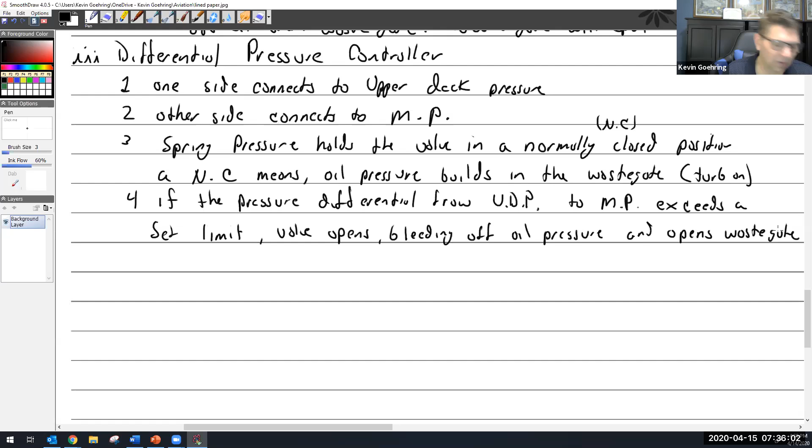The valve opens, bleeding off oil pressure, and opening wastegate. Opens wastegate, which would be less turbo. I'll put that, less turbo. Oops, less turbo, there we go.

And usually the set value for these things is around 2 to 4 inches of mercury. And the reason behind this, I don't have this on here, but I'll put 5. And all of this prevents something known as bootstrapping.

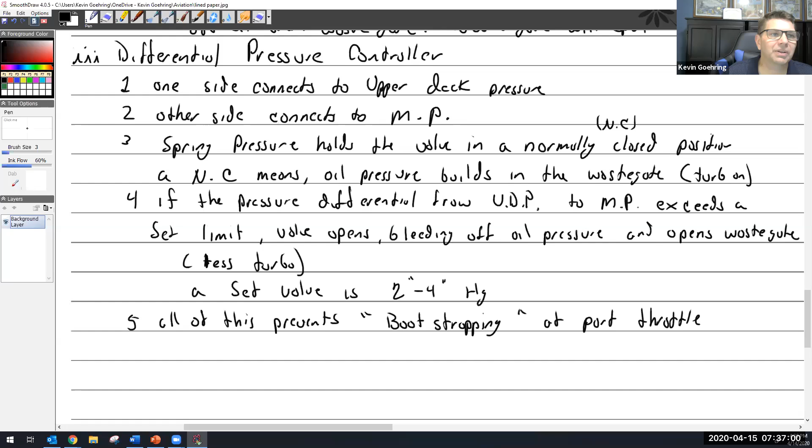At part throttle. I don't love the whole bootstrapping name, because the term bootstrapping comes from pull yourself up by your own bootstraps, which means to help yourself. I think throttle sensitivity is a better word for it, because it clearly defines what it is, but they call it bootstrapping, where just a little bit of change causes the turbo to speed up, and it speeds up, and that causes a little more change and more change and more change, and you don't really want that. So that's why they have that there.

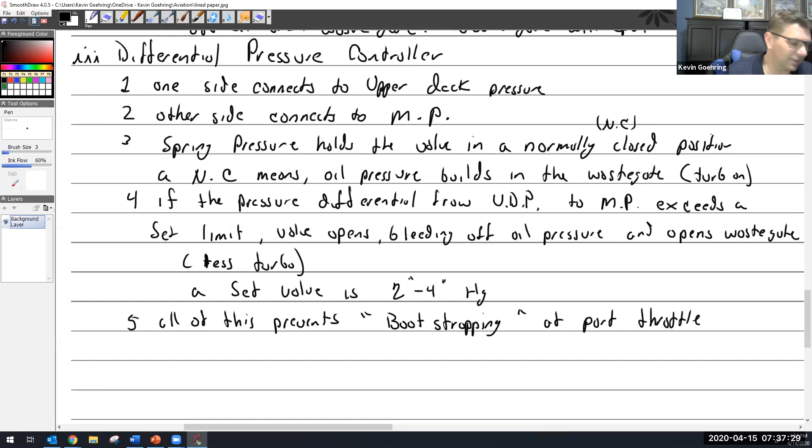All right, let's talk about—we'll just go through a little bit slower—what it looks like while it's operating, while it's actually running. So, operation.

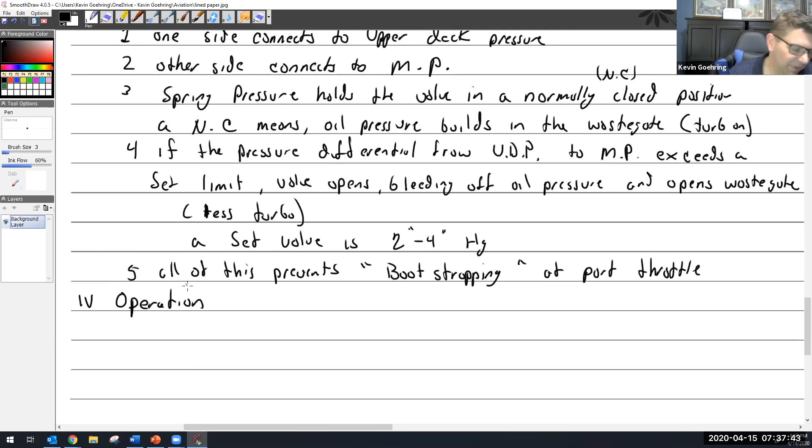So we got the engine running, so we'll say at part throttle. We'll start there, at part throttle. At part throttle, the density controller is closed.

Asking for more turbo, more pressure, right? We could say, why is it actually closed? Why is it asking for more pressure? Well, it's going to be really two reasons. One, because the density controller is doing its job.

But if the density controller wasn't in the picture, then we kind of have to think about—and this is a good thing to do to see if you understand the system—then we sort of stop and think about, well, okay, then what would the density controller probably be seeing? Well, if I'm only at part throttle, maybe 1800 RPM, not spinning too fast, we could perhaps say that there's really not enough exhaust pressure to begin with to spin the turbo fast enough to even get it up to 40 inches of manifold pressure. Maybe, maybe not—it depends on the turbo and the system, and what's happening with it.

Is it going into the sonic venturi, trying to pressurize the cabin and the doors open? Who knows what's going on, right? So it's probably asking for more turbo. So it's doing that. Let me see, where am I here?

Okay, yep. So, however, I'm going to move over now because I think everybody's probably got their notes written, and I can come up to here. Can you go back just for a second?

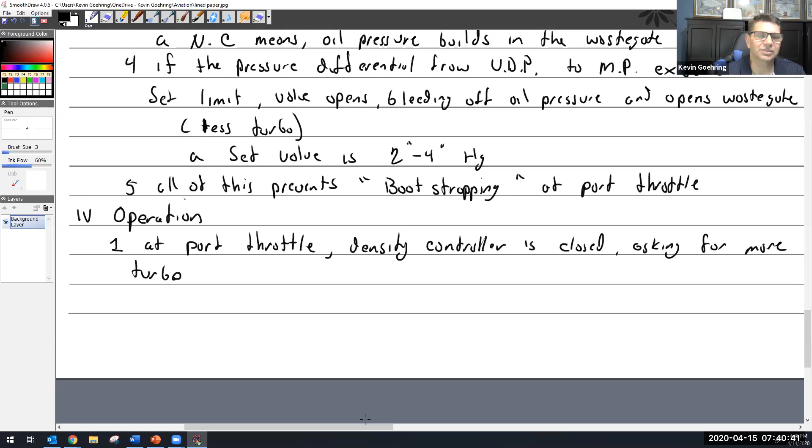More power. Okay, can I move it now? I'm moving. All right, nobody imploded.

Okay, so what else? So we'll make this point too. Point number one: part throttle, density controller, unless it's got its full 40 inches, it's going to keep screaming for more. Well, it's not going to have 40 inches, I told you for two reasons. One, because it's not all alone in the system. The differential controller is going to be inside the system, and it's already taking over control because it's going to activate first, because really the density controller is more designed for full throttle operations.

Here we are with the density controller; the differential controller has already taken command of this system because it can. So the differential controller, meanwhile, the density controller -- nope, don't want to say density controller, don't want to say that. Does start with a D. The differential controller...

...senses the difference between upper deck and manifold pressure. So remember, over on the left side, we could say that the density controller is saying give me more, but it's not involved in the system right now because the differential has actually got priority over it, if you will, at this point, because it is open. And it is already starting to drain off oil because it is sensing the difference between the upper deck and the manifold pressure.

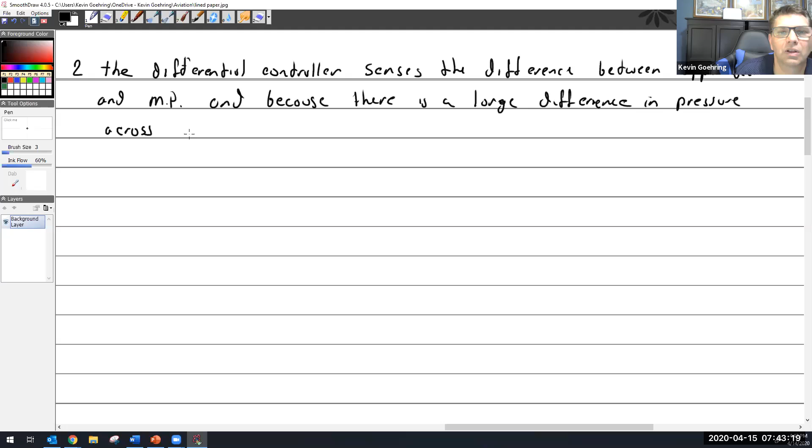Wow, I'm just not really doing the job with the writing today. Across the throttle plate.

All right, the differential controller senses the difference between upper deck and manifold pressure. And because there's a large difference in pressure across the throttle plate, it's going to do a couple of things. One, it's sensing that difference. It doesn't want that difference. If there's this big difference, we're going to have bootstrapping, or as I said, throttle sensitivity. Don't want it. So this is going to take command, and...

This allows the differential controller to adjust the wastegate.

And it is going to say less turbo, less turbo. Why is it saying less turbo? Because we're at part throttle and there's too large of a difference between the manifold and the upper deck. You don't want the large difference. Why don't you want the large difference? Because you get bootstrapping, you get throttle sensitivity. So this helps control bootstrapping.

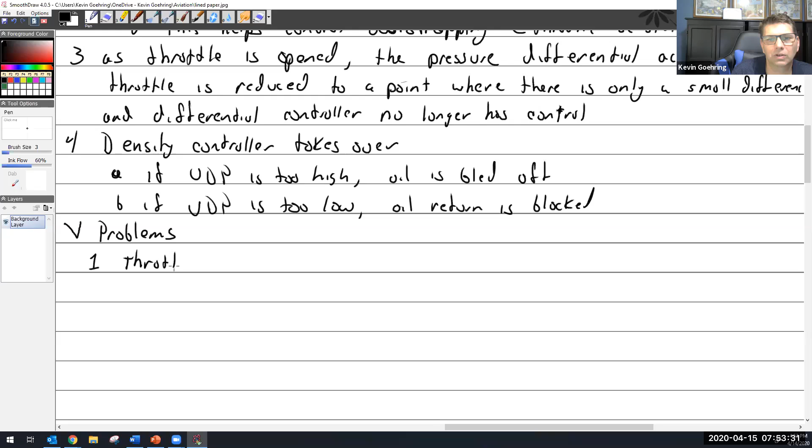Throttle sensitivity. All right, first of all, turbo systems respond slowly. Systems respond slowly.

And if you kind of think about that whole system, as we go through it, we're realizing that the whole thing is responding on oil pressure and how long that actually takes to go through the system. So we can look at the differential controller. I move my throttle a little bit, and the difference between the upper deck and manifold changes, the pressure changes. And so the differential controller is going to recognize that, so it's going to move to block some oil pressure. Well, now the oil pressure has to build up, and it has to move the old rusty wastegate in there.

Because they always look old and rusty. And so it's got to move that, and then it moves that, and then it may move it a little bit too much, and then it's got to go back and readjust, and it just goes back and forth till it finally finds a spot where it kind of likes, and then hey, there it is. And by then you've either changed altitude or done something that changes the whole thing. So it moves rather slowly. So keep that in mind.

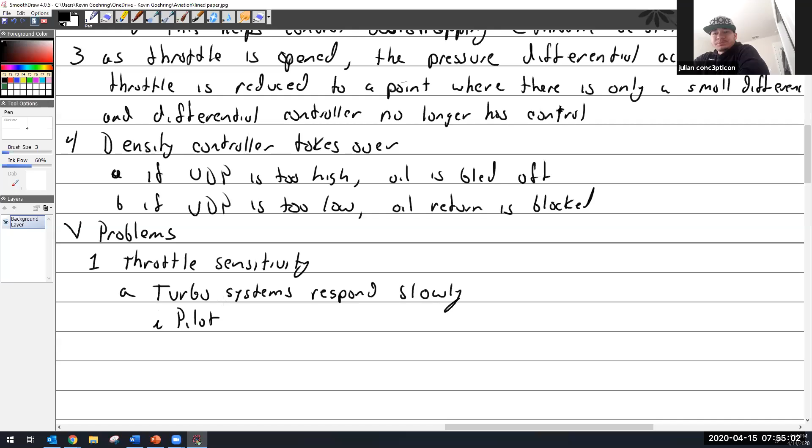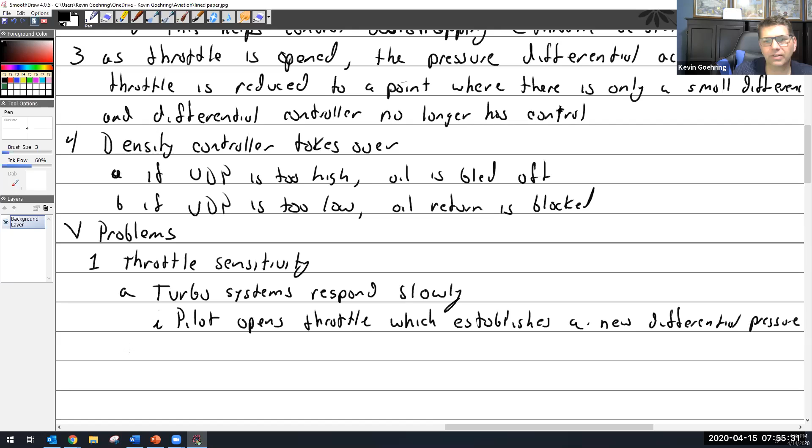So I can write that. Pilot opens throttle, which establishes a new differential pressure. All right, so that happens. So pilot just moved it. Now we have new differential pressure.

Well, so the differential controller senses the change and repositions its own bleed valve. All right, so now you got that going on. Okay, so now that happens, the new bleed setting...

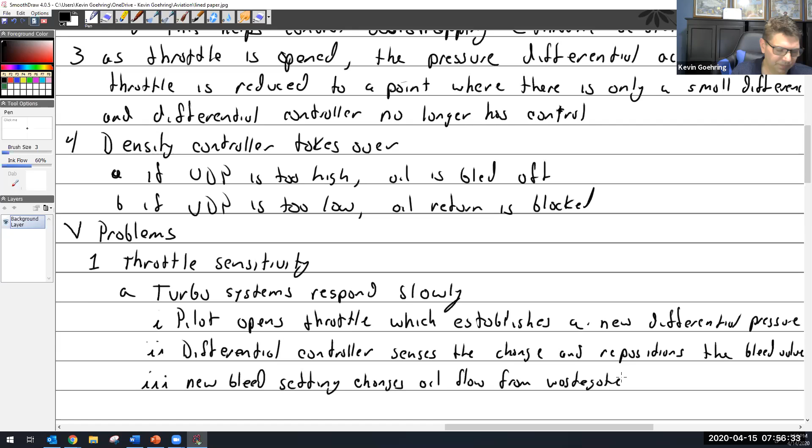Changes oil flow from the wastegates. A new bleed setting changes oil flow from wastegate. All right, so now you've had this change in the wastegate. Now the wastegate changes position.

Changes position and increases, in this case, we'll say increases turbo speed. Right, so now it increased the turbo speed. Well, that was good because it's kind of what it wanted to happen, but the increased turbo speed increased upper deck pressure, which then increases manifold pressure at the same time, which increases upper deck pressure and manifold pressure.

I'm not going to go much further with this one, so don't freak out. All right. So that then increases the turbo speed, which increases upper deck pressure, which then of course does have a change in manifold pressure, which then has a change in the differential between the two. So I could put that, which changes the difference, the DIF, which changes the difference between the two. All right, well, now we have a change in the difference between the two.

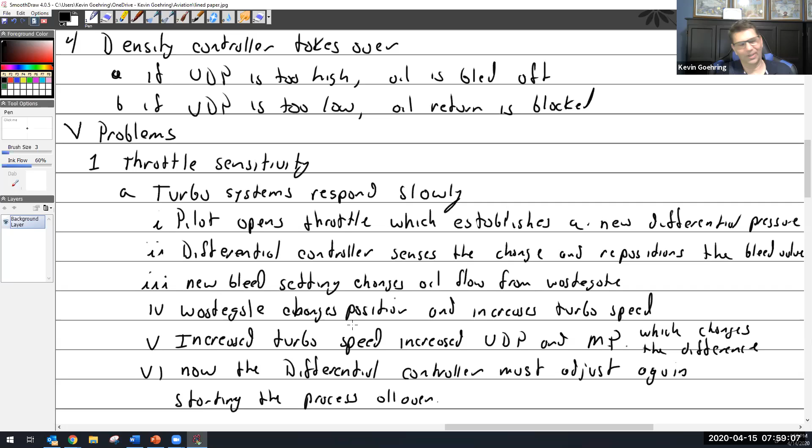And we go right back to the start, where the differential, well, not quite the start, back to step two. Now the differential controller senses the change and repositions the bleed valve. The new bleed valve setting changes the oil flow of the wastegate, and the wastegate has changed position. And so it keeps going over and over.

I don't honestly know how cars are doing it right now. My assumption, of course, is it's all done very much electronically with something that is rapidly positioned based upon throttle position, inputs, and all other things. So it's all probably computer controlled. This is not, so it's a much slower thing.

So, all right, let's see. I don't want D, I want B because I did A. So let me B.

Wonder if there's a way I can make this more simple, but every time I try to make something a little more simplistic and easier, I think I leave out stuff. So let's talk about bootstrapping.

Bootstrapping. We know that that is defined as a throttle sensitivity. So if the differential controller was not operating, if we took it out of the system and we said, hey, we're just going to rely on a density controller, in theory it would work, right? Because you're just going to use the throttle positioning to try and control your manifold pressure, but it would be extremely sensitive.

So if the differential controller was not in the system, any increase in throttle would cause an increase in turbo speed.

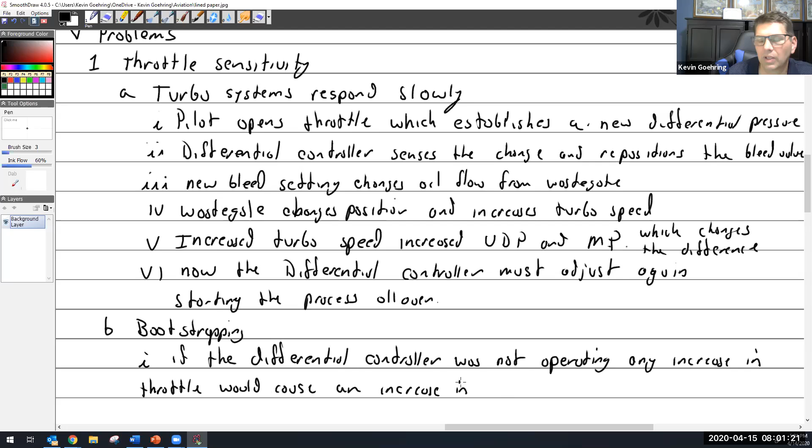Which is kind of a good thing, but if I only open the throttle a little tiny bit, then I really wouldn't necessarily need an increase in turbo speed, because I probably have more than enough pressure in the upper deck to handle anything that I want, all the way up to and including full throttle.

So let's just say I'm at 65% throttle and I go to 75. Well, I'm sitting here at 65 and I'm holding back the pressure. Upper deck is already set at 40. Upper deck's saying, let's go, man. I'm ready. I'm full throttle capable right now. Let's go. And you're like, well, I'm only at 65 and I want to go to 75.

So I squeak open the throttle just a little tiny bit and have this massive rush of air inside, or even some air, which then is going to cause the turbo to speed up even more. And thankfully the density controller is going to block it at 40, but otherwise it wouldn't. And so this whole time I've just got way too much manifold pressure.

This causes, or at least tries to cause, an increase in upper deck pressure and then manifold pressure without a throttle change.

So if you kind of follow my thought through, because I added without a throttle change, I'll put down little parentheses. So as the pilot, I've only changed the throttle a little bit and I've let go of the throttle. Okay, I'm not touching it now. So I've moved my throttle a little bit. That caused a small increase in manifold pressure. The small increase in manifold pressure caused my engine to speed up.

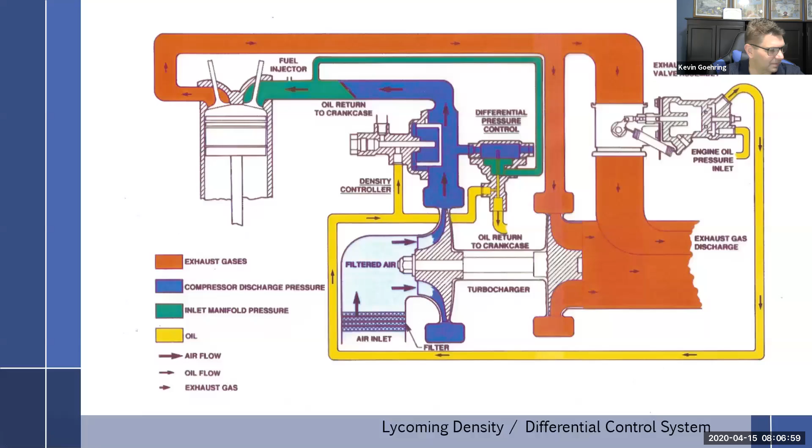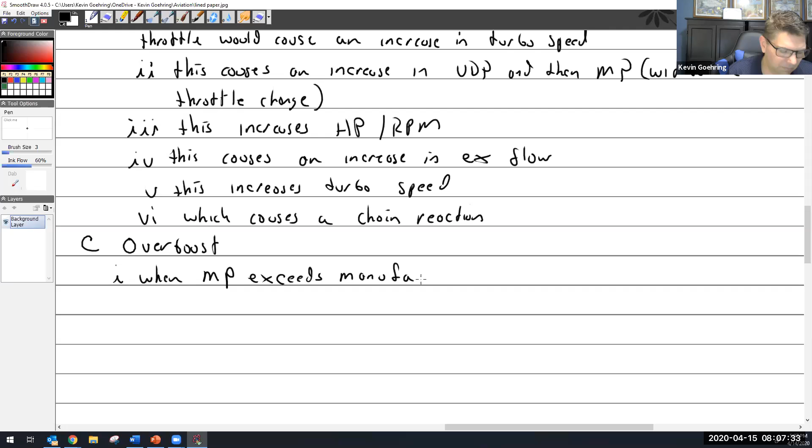Which brings me to my next point: overboost. There are service bulletins and instructions that talk about overboost. Overboost is a very bad thing. Overboost is defined when manifold pressure exceeds manufacturer's limits.

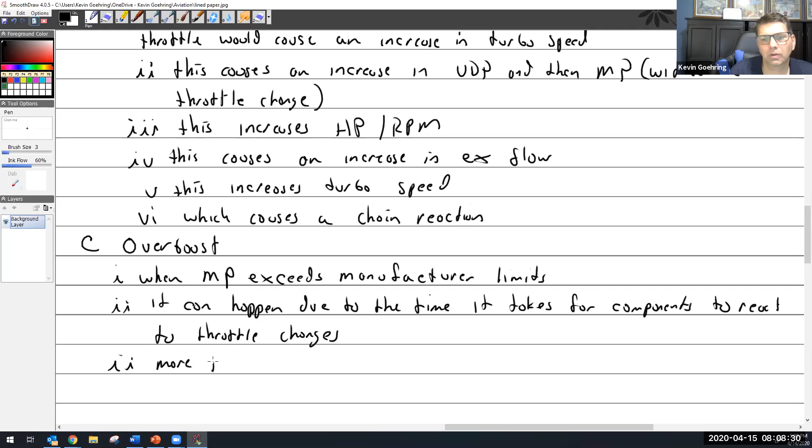It can happen due to the time it takes for components to react to throttle changes, because it reacts slow. It's more prone to happen on manual systems.

And it can also happen with fast pilot inputs.

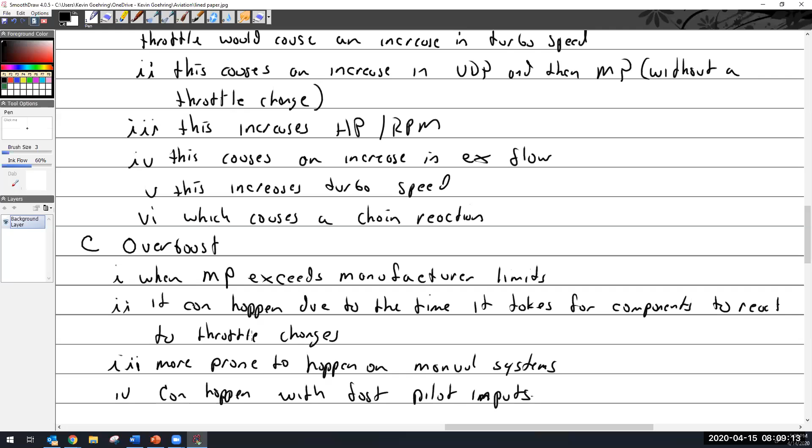Like the Ferrari. What's that? Like the Ferrari. Yeah, exactly, except the system saved me on that one—the pop-off valves went off.

All right, I'm going to write this down, and we'll compare and contrast. There's another thing called overshoot.

And that is when you miss the runway. What's that, you miss the runway? No, that's overshoot.

Overshoot is a momentary overboost due to system lag. So really, points number 2 and number 4 fall more into the overshoot category. Overshoot is more likely to happen there because we're just talking about the time it takes for something to react. It's not likely you'll see a long period of overboost just because of the time it takes a component to react.

So I should almost write those points more down there—let me fix my notes. There, can happen with fast pilot input. So in theory, hopefully, you'll just get this overshoot.

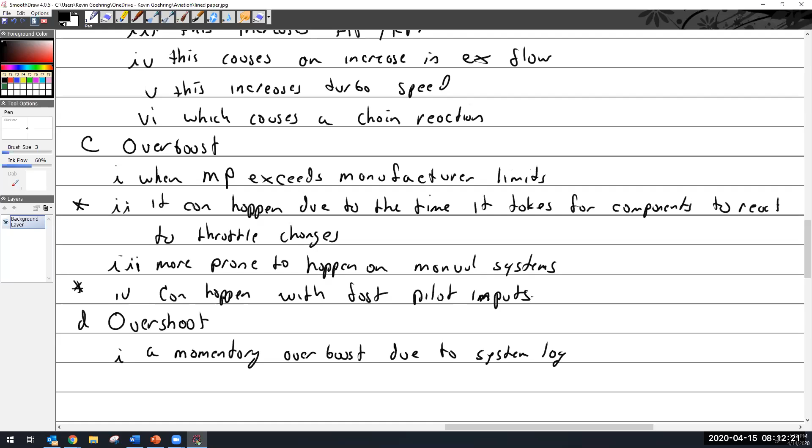All right, what do we got next here? How's everybody doing, caught up? Caught up. Not yet, not yet. Janet says she's good—that's the great thing about Janet being last to talk, every time I look down I go, I'm good. And I think I'm almost out of paper, so this would be a good time to switch. Steve is the new Janet. Well, it's because I'm really trying to take proper notes, working hard to write slowly. Well, good, I'm happy to hear that.

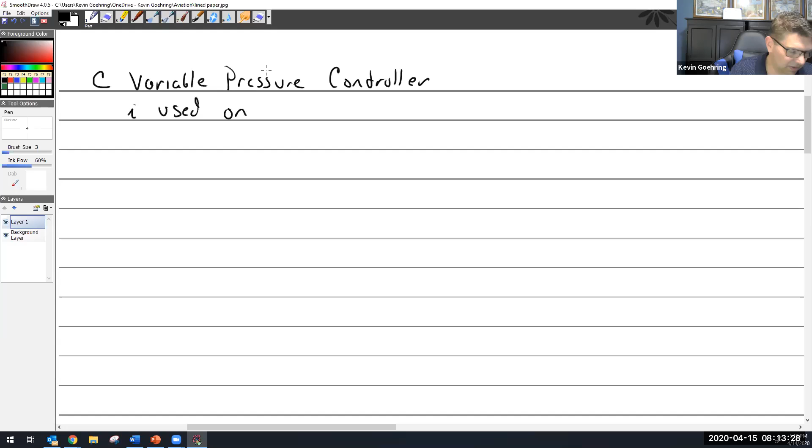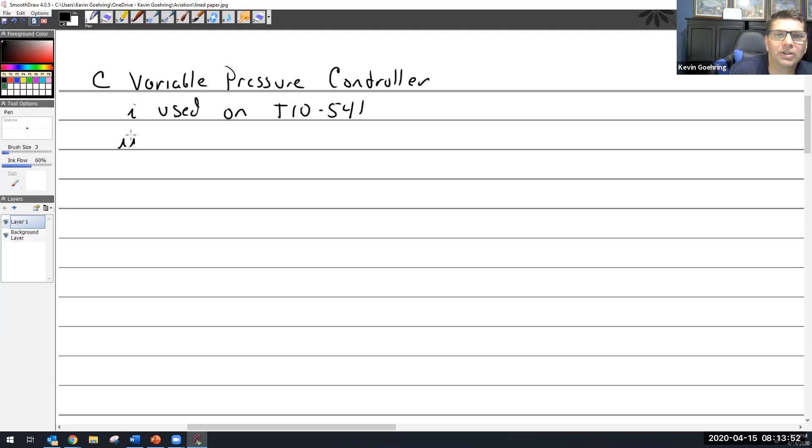Okay, let's talk about our next system: big C, the variable pressure controller system. This one is actually used on the TIO-541. I liked the TIO-541s—it wasn't that much bigger than the TIO-540, but among other things, the cylinders had oil-cooled exhaust guides with a little passageway going around them, which I thought was pretty cool. So what does this one do? It replaces the density and differential controller.

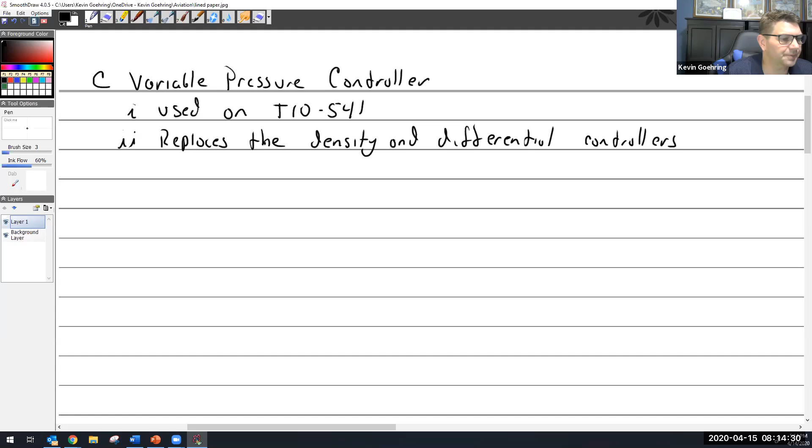Let's pull up a picture here. Hopefully I have one. Let's see. There we go.